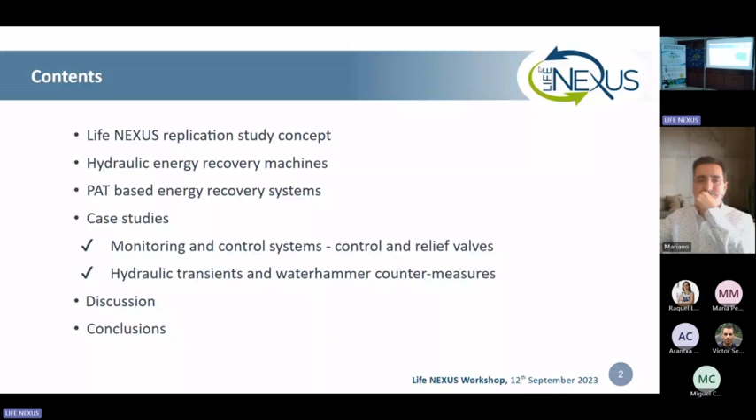Of course, the concept was to reproduce what is here in Porma, but we didn't take into account electrochemical batteries. We took into account both drinking water treatment plants and wastewater treatment plants, although our experience with drinking water treatment plants was better. But in Poland, we have also good opportunities in wastewater treatment plants.

So you can see here the map of Poland with some sites. I'll concentrate on these sites with a white interior inside the circle - these are those that I will be talking about.

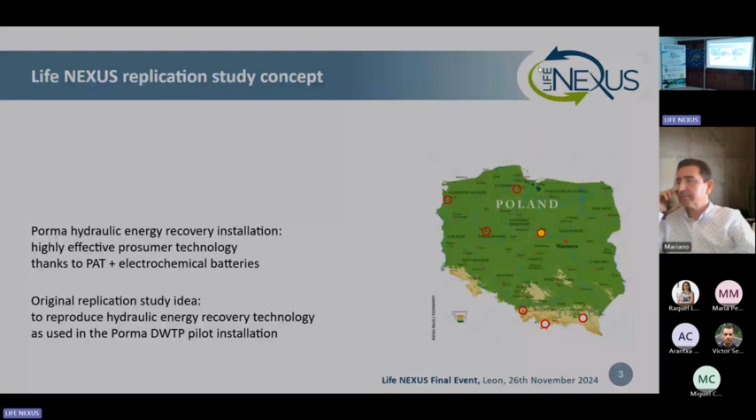So of course, we took into account hydraulic energy recovery systems, and with drinking water, classic turbines, as you can see on the left. There's the existing equipment, a classic Francis turbine in an installation that we visited. This is several hundred kilowatts.

Then a real in-conduit turbine, which is installed also in the south of Poland. We consider, of course, the alternative - pumps - and some advantages were already discussed here.

Yes, a working KSB pump in one of our water intakes in the south of Poland, and we took into account also wastewater treatment plants and proposed in one of them using just a tubular turbine, but this is always at outlets, not at inlets to the wastewater treatment plants.

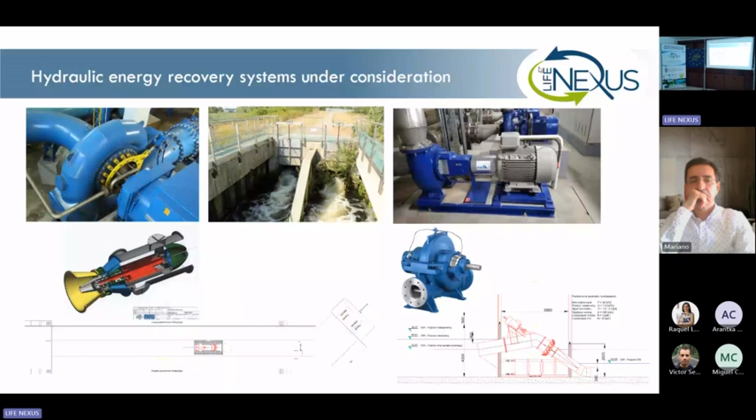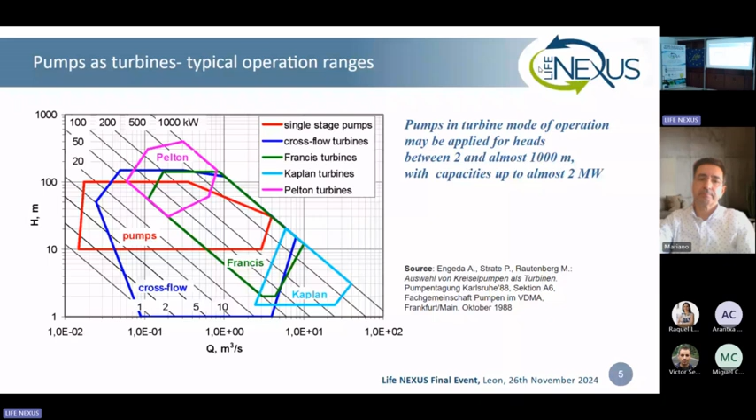So as you perfectly know, we concentrated on pumps as turbines. As you know, these are considered feasible for medium heads between 10 and 100 meters. The range usually starts somewhere with tens of liters per second up to tens of cubic meters per second.

In comparison with classical turbines, they are a little bit less efficient, but the main problem is regulation, and I'll talk a little bit about it. In fact, our assumption was that when we introduce an energy recovery machine, we should reproduce the same discharge hydrograph, the time course, as it was before.

In reality, it can be different, but in simulation, we assumed nothing will change at the distribution, municipal distribution network. So, in fact, in this case, you have variable discharge, and this is really a problem.

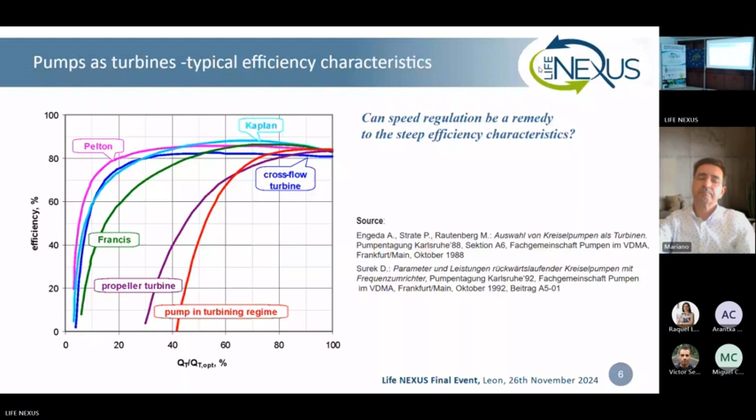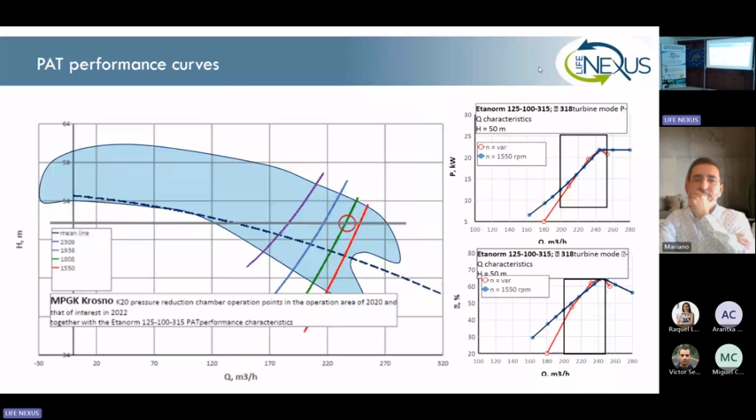The possibilities with throttling are much higher. The explanation is, of course, in the curves of Francis turbines. You can see that if you take such a hill diagram, the discharge curves are almost horizontal or even falling down, depending on the specific speed.

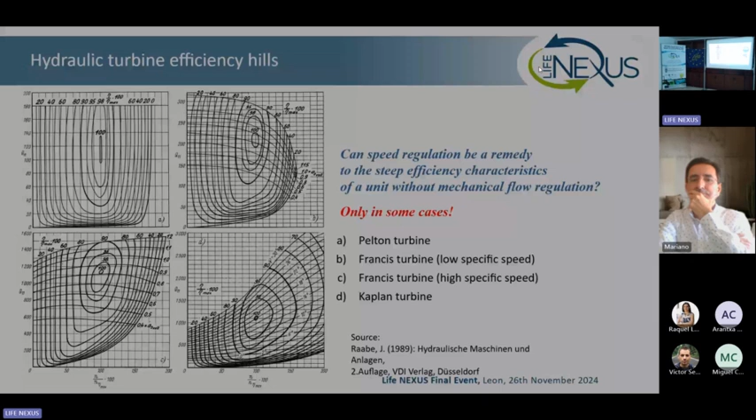It is different with propeller turbines, but in this case, they are not so often used in energy recovery systems, as they are meant mainly for lower heads. Here it is possible - you can see here the discharge versus rotation speed at various heads.

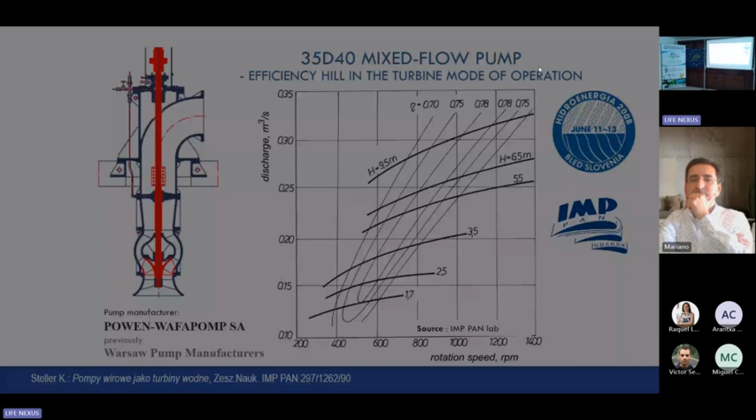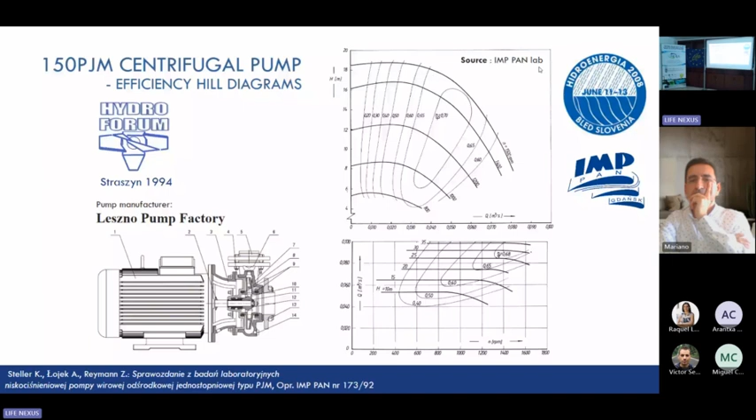However, if you take some centrifugal pumps, it is quite often that the curve is flat, so changing the speed doesn't give much. This is the reason why we used also part with throttling.

You can see typical curves that you know - characteristics. Usually there are three curves: one is the runaway curve, where the torque is equal to 0. Then you have the second one at 0 speed - that is, the machine is stopped, and this is the discharge. Of course, the efficiency is also 0, as you have no speed, and you can have just a bundle of curves with different speeds.

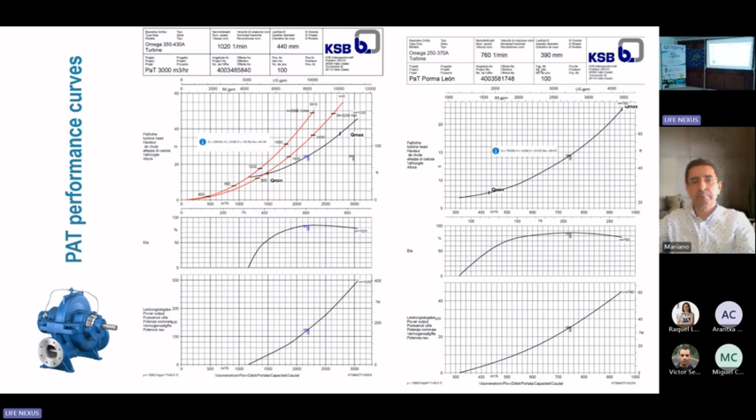If you ask KSB or some other company offering PATs, you'll receive the recommended speed, the rated speed. We followed a recommendation from our Spanish colleagues, but we also knew that KSB has been dealing with this problem for decades and offers PAT turbines, so we decided that throttling will be used.

You can see an example with two operation points located above and below the performance characteristics. Of course, you cannot increase the discharge. If you are above the curve, the only thing you can do is throttle in series with your PAT. If you have too little head, you are below it.

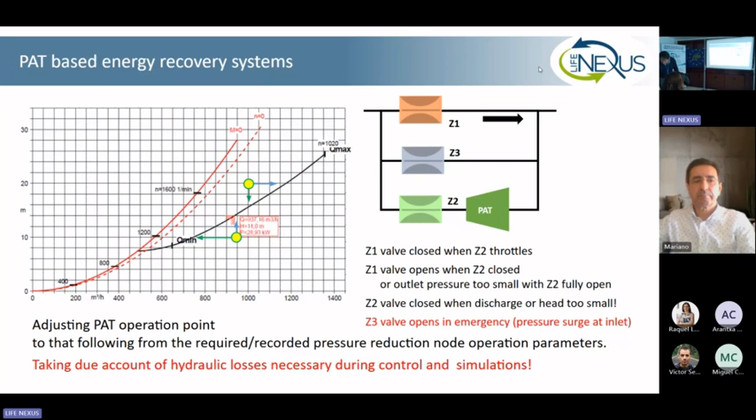If you have high discharge but the head is too low, the only thing to do is use a bypass. This is an example, and you can see here also a relief valve.

The valves we selected are the ones usually used in water treatment plants—membrane valves. You can see the typical scheme with three such valves. Pay attention to valve Z1, which is in parallel, and Z2, which is in line with the PAT, with the control ranges shown.

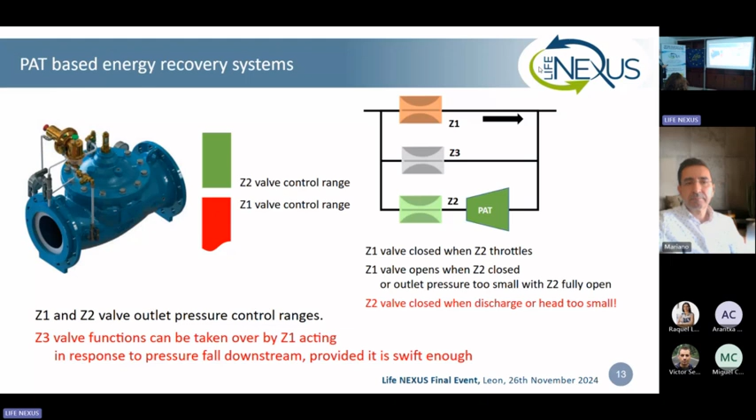Usually these valves operate and are controlled by the pressure downstream of the valve. The pressure transducer can also be placed at some other site, which we in fact used. So our first case study was close to Krosno in the south of Poland.

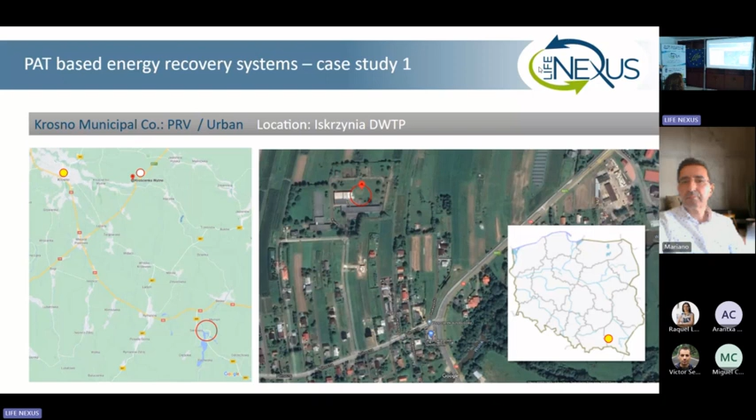You can see the location on the map. Water is delivered here by a pipeline about 14 kilometers long, but it has a very high diameter, so there is not a major risk of hydraulic transients.

Here is the system—there is a municipal network, and here is a chamber where you have to reduce the pressure from about 9 bar down to 4 bar at the entrance to the municipal network.

The discharge changes, and there is also a drinking water treatment plant there, which probably will not be used. Previously they planned to stop it completely, but our proposal is that the drinking water treatment plant is now getting back into operation, and the water network operator was highly interested in this.

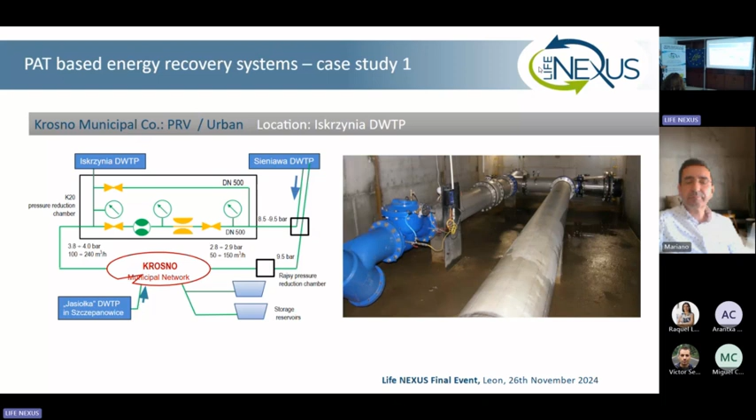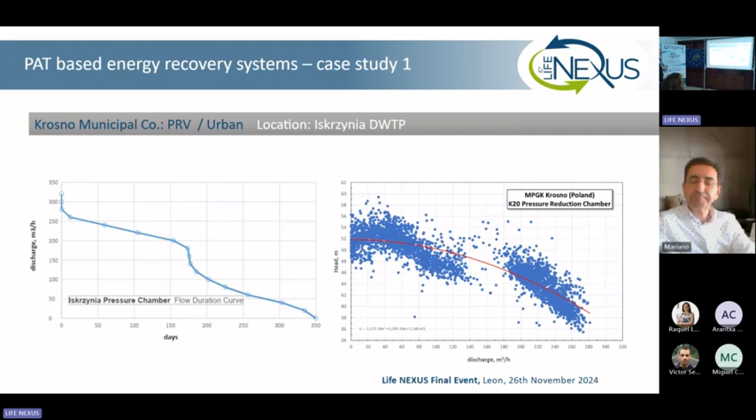I don't know what happens. Yeah, but okay, it is not so important. This is what we proposed.

In the next case we'll show you also the relief valve, but in this case we had the situation that the existing membrane valve is sufficiently swift, and the height of the hydraulic water hammer is very limited due to the high diameters.

We checked it—the discharge here is 210 cubic meters per hour, head 50 meters, and we expect 22.7 kilowatts. We selected such a unit, and at the end we should get 4 bar at the inlet to the distribution network.

We also calculated the annual generation—it should be 65 megawatt hours. What's important is that we used data from the utility, and in both cases under consideration, we are able to use something like 40% of the raw energy.

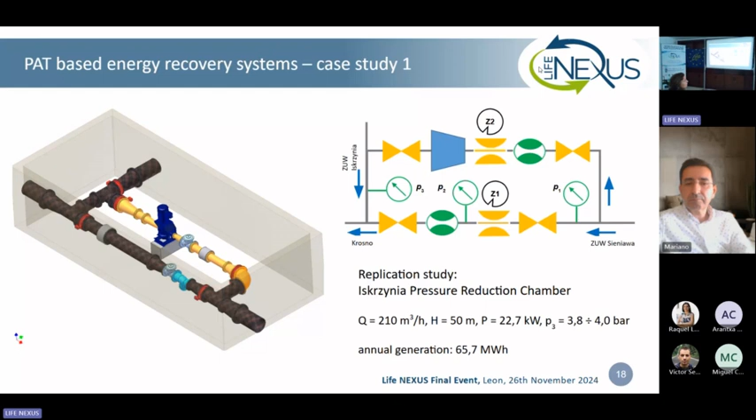We assumed 75%, but in fact, due to the throttling we have to apply, and due to the hours in which we cannot use the PAT due to parameters, it is only 40%.

So if you look at our discounted payback time, as you can see, it is 14 years. But the simple payback time is 7 years.

It is with an internal rate of return of 11%.

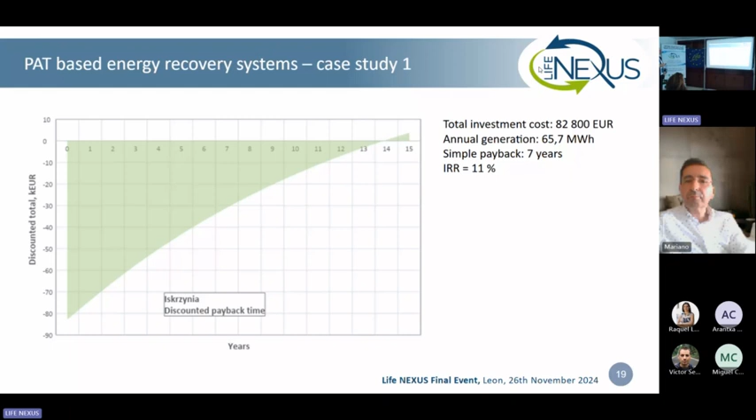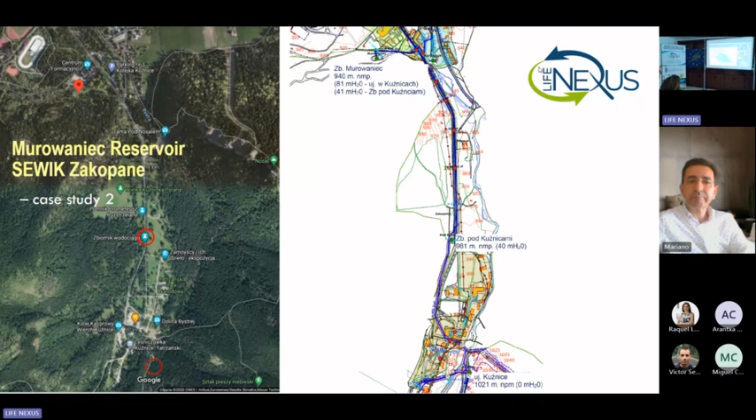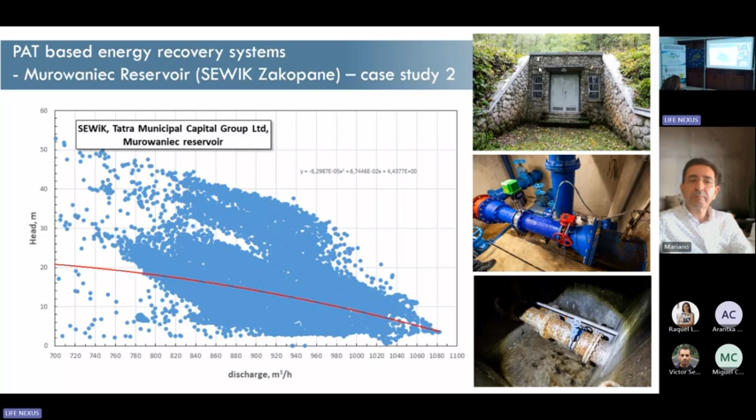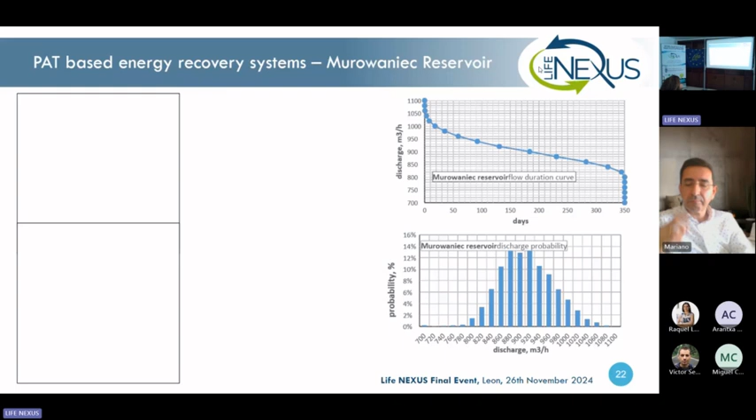We don't quite understand why it is so high. We try to understand it better, but I have a feeling the utility data is not reliable. This is the flow duration curve, and this is the solution we proposed.

In this case, we have also throttling in parallel and in row. This is a pressure reduction chamber to the storage tanks, and water flows to the network already from the storage tanks. So the pressure limitation at the inlet follows only from the need to keep the pressure not too high when it flows to the open surface tanks.

So it was something like 1.5 or 2 bars, not more. I don't remember exactly - it says the over pressure should be 2 meters. So the flow is not too high. Annual generation is much higher, but the head is average head, and average discharge, at the time when we can use it.

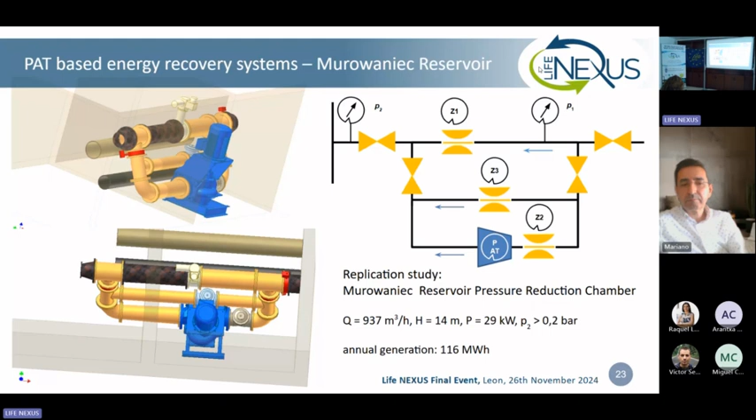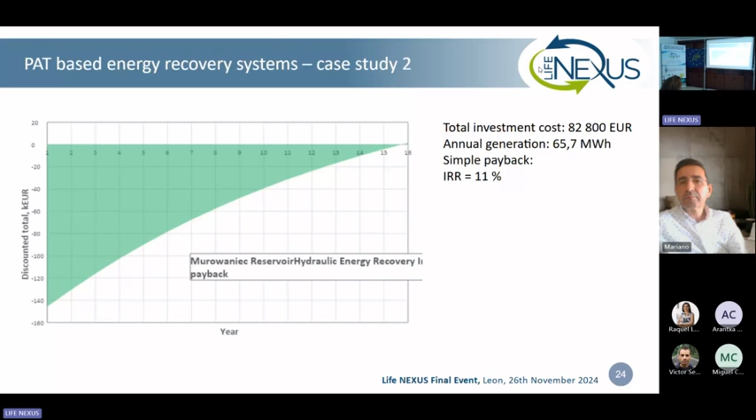So in this case, I have not written down a simple payback, but it was also something like 7 years, I remember. But if you take into account discounted payback, it is much more.

These are typical diaphragm actuated automatic valves that you use here too, and we had to choose between various options. Plunger valves have a very high price. Luger valves, which are now in Zakopane, first of all bring high hydraulic losses. So far as there was no energy recovery, it was of no significance. Secondly, it can be fast, but the losses are immense.

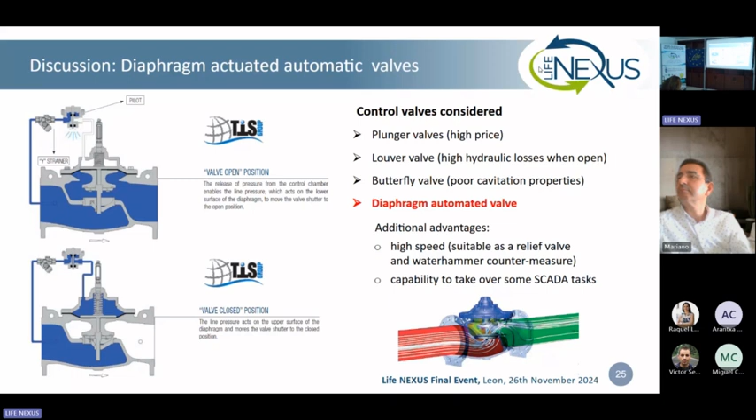Butterfly valves, as they are now, have very poor cavitation properties, and there's also a problem of high losses when open. It is no problem when it regulates, but when it is fully open, the losses are a problem. So we also received such cavitation characteristics from the company.

I would note that such a configuration also gives us the opportunity to increase efficiency of the whole process by properly operating the machine, while it elongated the operation time of the recovery unit, but I will not go into details.

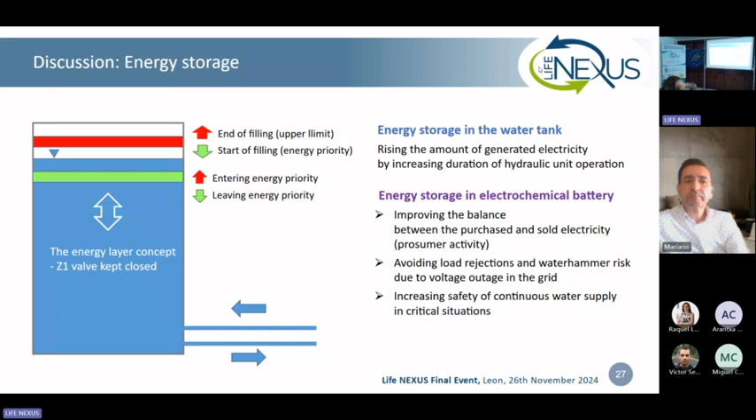I would just summarize: understanding the need for energy effectiveness, including recovery of hydraulic energy dissipated in municipal and industrial water sectors, is rising. However, promotional efforts and systematic identification of new opportunities are needed.

I would like to note that we had some problems with economic calculations due to regulations, as they quite often treat micropower sources as if they were all solar batteries or wind turbines. They expect, for instance, either additional storage or at least a frequency converter. This has an enormous impact on the price. So we, as an association, will fight against it, because it is nonsense - hydropower sources are controllable, and they help stabilize the system.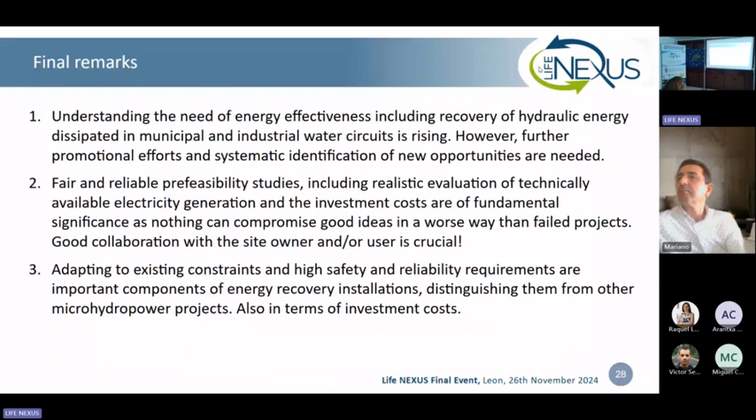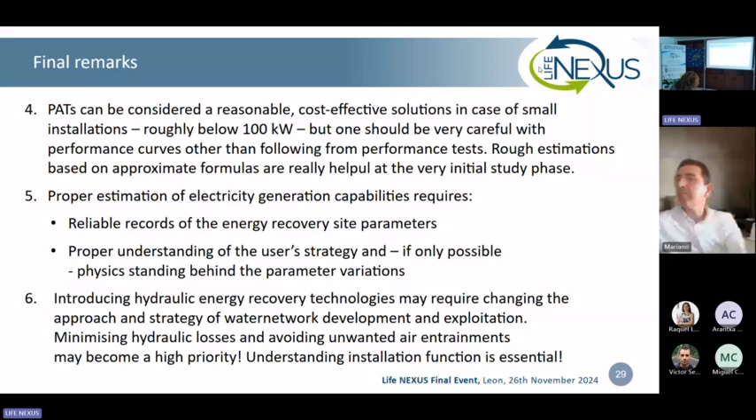So of course, fair and reliable feasibility studies are crucial. Adapting to existing constraints and high safety and reliability requirements are important components - more important here than in classical hydropower plants. PATs can be truly considered reasonable in case of powers up to 100 kilowatts, when one has no problems with regulations. Always having reliable records of the energy recovery site is important, along with proper understanding.

I would like to end here. Thank you for your attention.